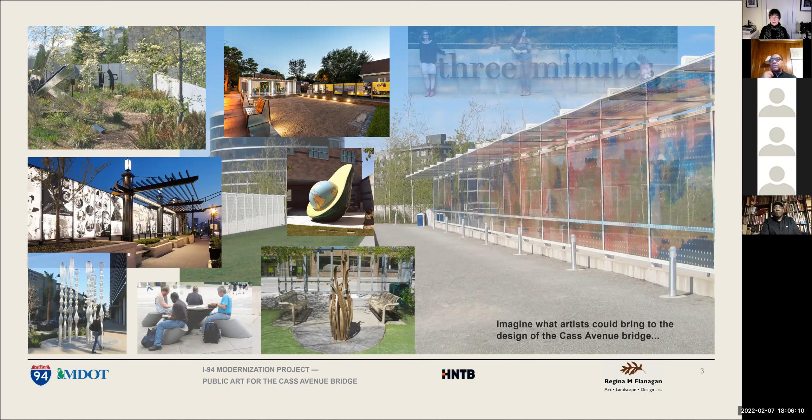The Cass Avenue Bridge—this is the piece of the Zoom meeting that is going to be an orientation to the project. The Cass Avenue Bridge is part of the Michigan Department of Transportation's I-94 Modernization Project and includes 67 bridges. Here you see the Cass Avenue Bridge.

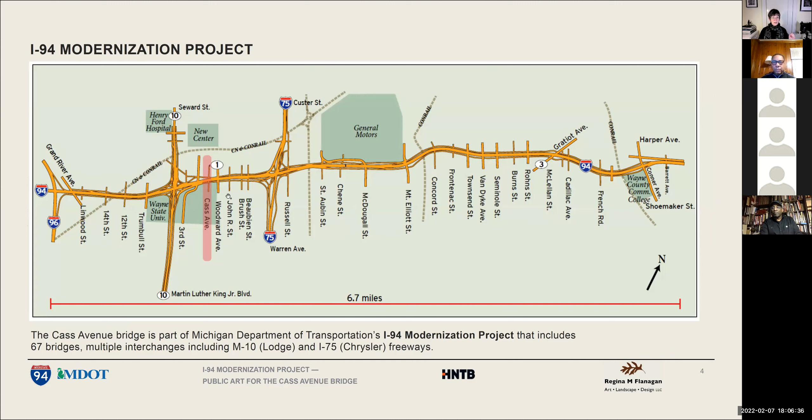The Cass Avenue Bridge is in Midtown, the location where basically Detroit's cultural district and education district is located. It includes the Cass Corridor, a famous corridor where many artists had studios, and Woodward Avenue, home to cultural and educational institutions such as the Detroit Institute of Arts, the College for Creative Studies, the C.H. Wright Museum of African American History, the Museum of Contemporary Art Detroit, and Wayne State University.

This project, like the I-94 Rehabilitation Project, has had deep, rich community participation, and will continue that tradition. From the start, MDOT sought out voices across the community to help inform the project design. The guidelines for the project talked about public art as being a key component, with unique potential to meet the goal of having the corridor reflect the community's hopes for the freeway redesign, the community identity, and Detroit's rich cultural heritage by contributing to placemaking, elevating aesthetic quality, and revealing history and culture.

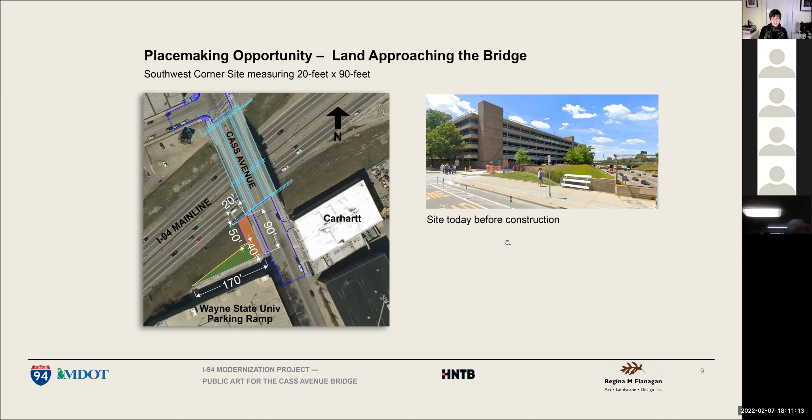Well, as you can probably figure out, the site itself will need some boundaries because there's a slope from the site down to the main line.

So there's walls and railings that will enclose the site, and they become potential for an artist's work too, as far as considering the entire site for placemaking.

So the walls and railings are potential, and the wall will basically be where you see the orange band on the left image, because as you can see, the site needs an edge for safety.

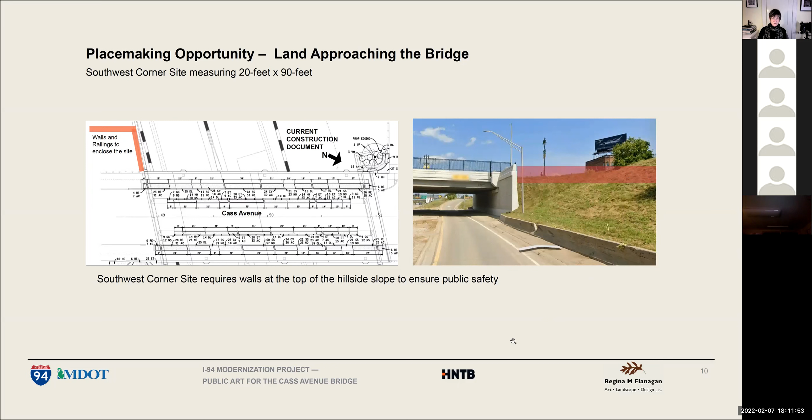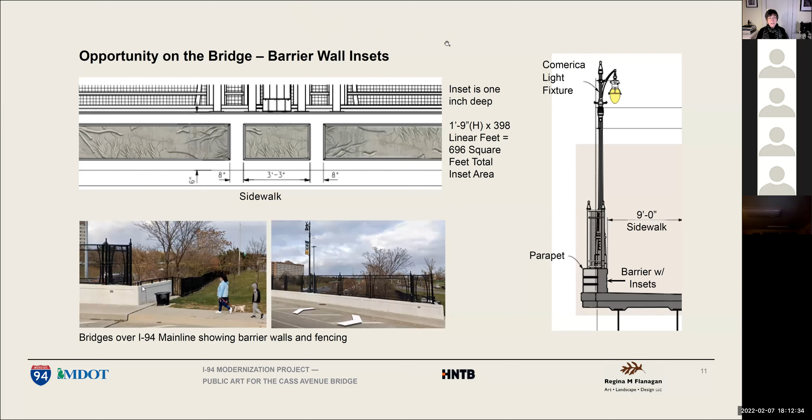We're continuing on through talking through the opportunities on the bridge. Now, the previous slide, if I can get back to it, it's not letting me do that right now. The previous slide showed an example of the site.

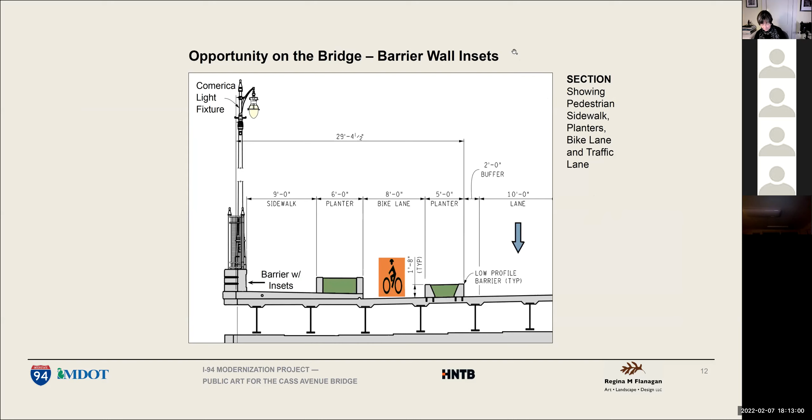I'm going to have to do an escape here because I'm losing control of being able to navigate the slides.

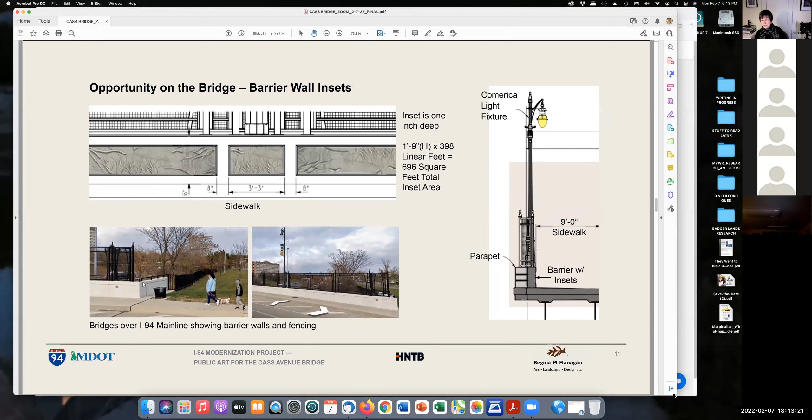I think you can all see them still pretty well. But I'm going to go from this on my screen and I'll make it as large as possible, even though it won't be full screen, but I think it's still pretty viewable.

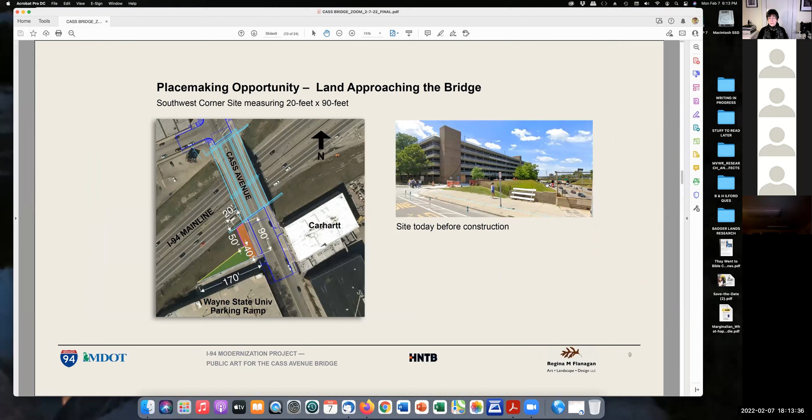The opportunity on the bridge includes these walls that you see here. And we're going to show you some examples. Here it is. This is the example I wanted to show.

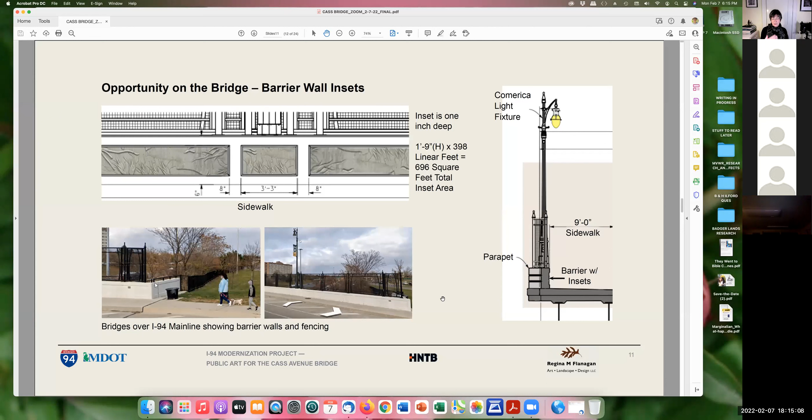Which is the Trumbull Bridge. So this one is just shown to, presented to show you the insets on the barrier wall. But this is the actual section of the Cass Avenue Bridge.

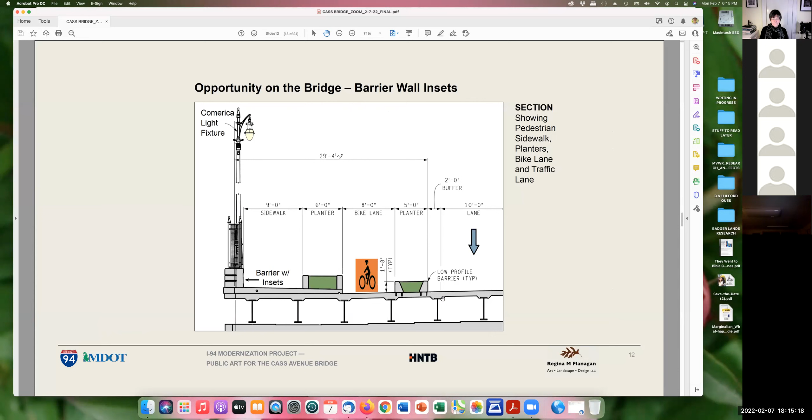The evaluation criteria, to go over that: the primary criteria is obviously the quality and ideas shown in your past work, evidence of completing projects of similar scope and complexity or progressively greater scale, and that the past work is constructed of material durable in the outdoors, because this is a real challenging outdoor environment.

We want to know about your ability to work collaboratively with government agencies, design and construction professions, and community groups in the creation of a project. That's particularly important. Also, examples of gaining inspiration through structuring and conducting community engagement.

When I come to the point of talking about the artist statement, which is part of this application, I would urge you to talk about your experiences in particular that meet these evaluation criteria. Also primary is familiarity with the city of Detroit, its people and culture.

Secondary is proximity to Detroit and the Cass Avenue Bridge site, the potential to involve students and youth in the process, especially during the summer design phase, and experience creating public art for a transportation project.

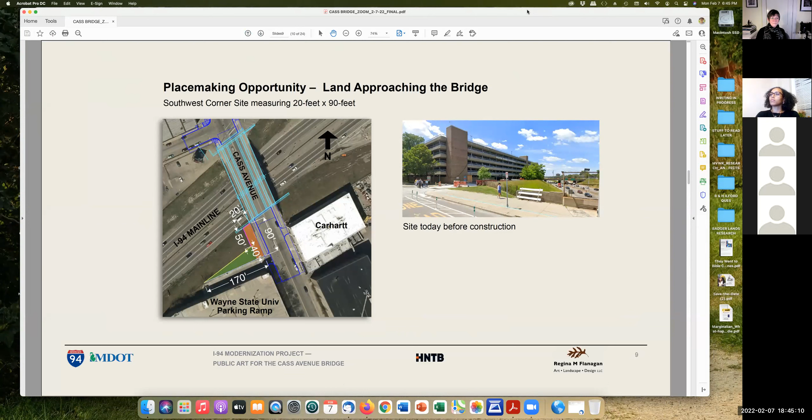I sense, since this is in the central business district of Detroit, you're going to get a pretty balanced 50-50 mix. People coming into the city in the morning and maybe going out towards the outer elements of the Detroit area in the evening. But it's also a campus, so I think my gut's telling me it's pretty evenly split. It's going to be about a 50-50.

That might help explain a few things. Woodward Avenue, for those not in Detroit, is where the Detroit Institute of Arts is located, the College for Creative Studies, etc. So there's a lot of movement throughout this district. Detroit also just built their light rail system on Woodward, the Q Line, which goes up and down Woodward. So there's becoming more of a pedestrian orientation and circulation pattern developed in this area, and this bridge is actually part of that.

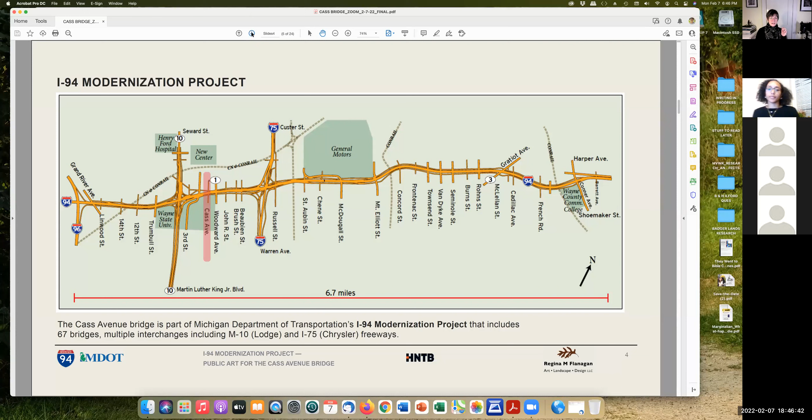If anybody who's from Detroit would like to add something, you're welcome to do so. I'm going to get back to some of the photos of the site, which might be helpful. While you're doing that, if there's no other comments, we can go to the next question.

What is the artist fee for the project? The artist fee for the project is included in the $200,000. That's the outer parameters of the project.

As artists get into working on the project, those of you who've done a lot of public art before have the capability to do a cost estimation pulling out your materials, fees, sub-consultants, subcontractors, etc. But for those trying this for the first time, I, as a public art administrator, can help by providing a budget document that helps itemize all the significant cost categories associated with your work. It's a form I've used with artists for a number of years, built off a Schedule C from the income tax forms, recognizing that you're a small business reporting in a certain way. So there's a budget document I can make available for those who need help figuring out what your fee will be. It's always a balancing act between how much you design, what materials you use, and your artist fees and what you need to see from the project. But I have to tell you that the $200,000 is inclusive, and it includes artist fees.

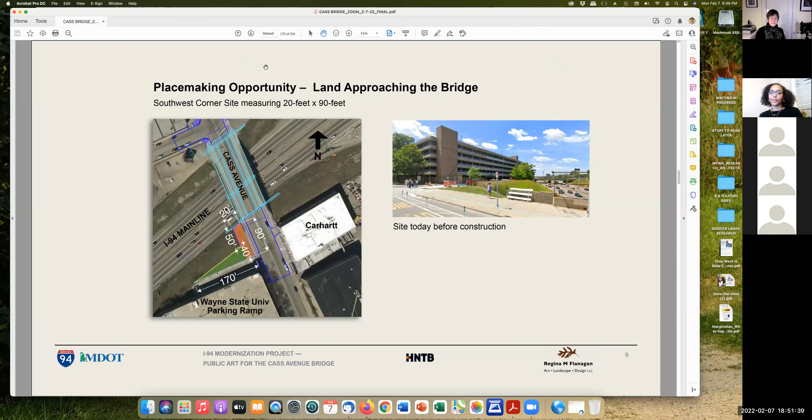Boy, that's an interesting question. I think that's the kind of thing that requires - I'm going to get to the barriers and the form liner issue here visually. I think that will be a discussion with Michigan Department of Transportation and the contractor. And I'm going to ask Eric to weigh in on this one too.

Doug, just a heads up, I'm going to ask for your opinion as well. But as soon as an artist is selected and we know what that barrier recession depth needs to be, you have an inch to play with. But if we need to modify it in any way to add more concrete so that the indentions from a form liner could be captured appropriately, that concrete addition would be captured by the construction budget. So I think in general, the answer is form liner costs would be the artist's responsibility. Any concrete related to form liner installation would be part of the construction budget.

Yeah, Eric, I might have a different opinion on that, but again, I think this is something we might have to talk to MDOT about. I'm not completely clear on the rules here, so I guess I would think that the material costs would be MDOT's, but I'm not sure. Material cost and forming costs would be construction costs, but I'm not sure. Thanks, Doug. That's definitely one I jotted down to get MDOT's opinion on, and we can go back to the team on that.

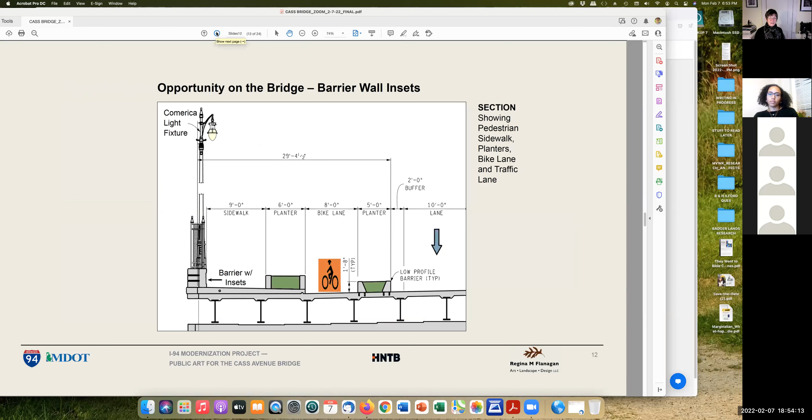Where is it? This is the wall right here. So we can't put anything on this sloped area that goes down to the main line - that would not be allowed for safety purposes. So I presume the artist is speaking of this green space we're looking at right here, which is up top and more flat, at the crest of that slope down. So let's answer the question with the understanding that we're looking at the 170 by 40 roughly space right here.

So would MDOT - I'm going to just replay this question. Would MDOT and the community be open to a contemporary design sculpture that took up space within and on the flat 90 by 20-foot area and also potentially spilled down into the green slope space? So this doesn't really spill down. So we're going to say, I think this is the gist of the question - and if it isn't, you can let me know - but can the artist work with this green area as well as the flat area?

And I believe the answer is yes, and it looks like the person that asked it says that I'm construing it appropriately. So Eric, we had talked about this. Yeah, everybody's correct there. Okay, so that space is open to influence by the artist, but it's not sloped, just to make that clear. And I might add...

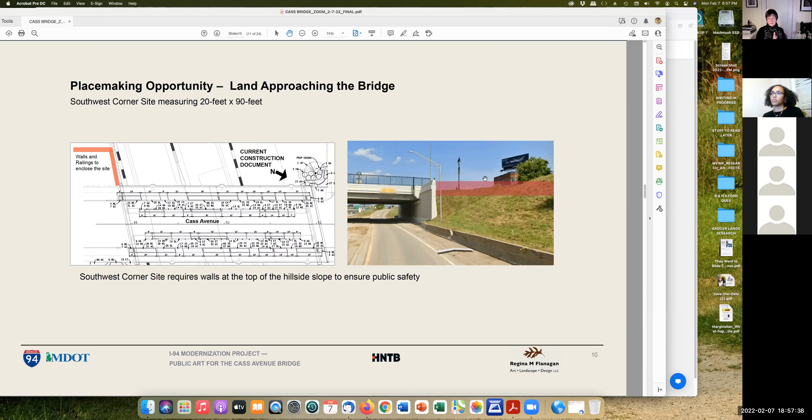Probably not too much, except if there are vertical elements, I would think. Because if you can imagine this orange band being the wall, and then the enclosure being back over here, unless the element is vertical, you wouldn't see it from the main line.

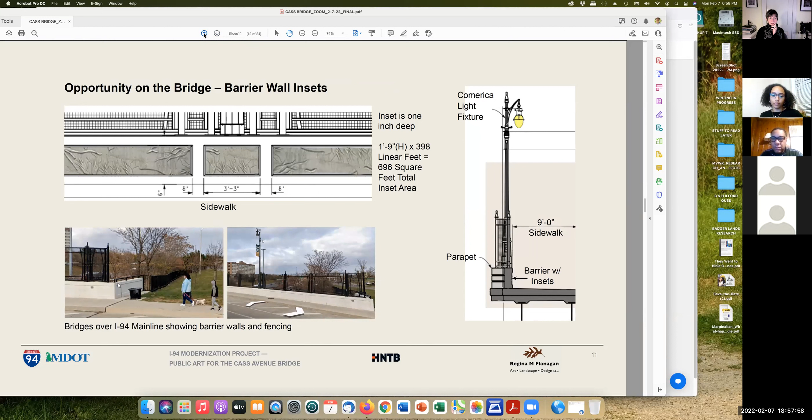Likewise, for anything sited on the flat area right here. Now, when we say in the guidelines or the open call that whatever is done with the site must meet both Federal Highway Administration and state design guidelines, there will be some things to talk about regarding vertical elements.

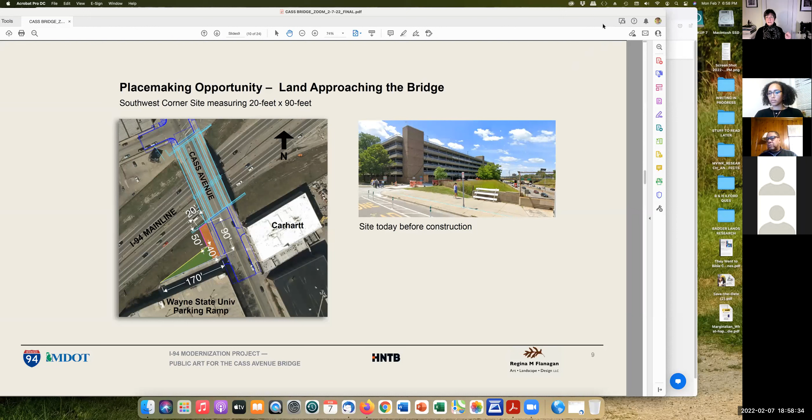I'll leave it at that right now because of sight lines, distractions, and general safety concerns. But all of that is something to be discussed as we get farther down the line. It becomes a kind of design challenge, something that you as an artist will be thinking about during design.

Regina, I would just like to add, in your picture here shown on the screen, everyone see that 20-foot dimension? There will be a full height retaining wall added to the west, or to the left, of that 20 feet in the future. So Regina was right on — really the only thing that would be visible from the freeway would be a vertical element. Everything else at ground level will be hidden from the freeway view in the future.

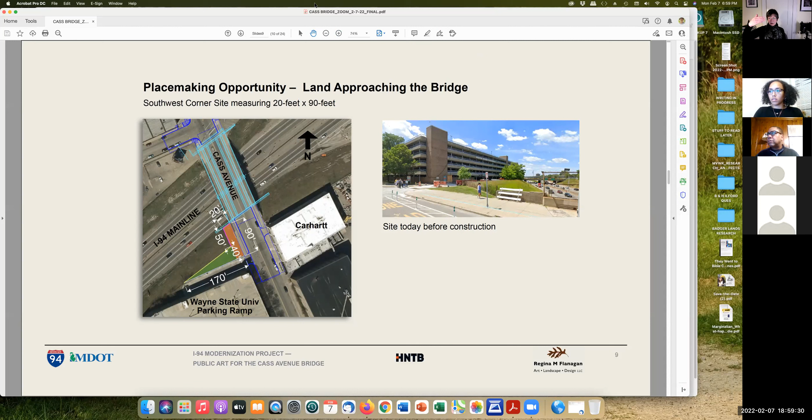How tall is the full height retaining wall? Oh boy, it's 20 plus feet probably. Now that's from the main line all the way up. Correct? Correct. Visible if you're traveling on the main line I-94, looking to your right as you approach Cass Avenue driving eastbound — it would be approximately a 15 to 20 foot high retaining wall.

Basically the height that you see there will just be continued, wrapping around. So there will be sound walls.

Another comment in the chat — well, these would be retaining walls because they're retaining the earth. There technically are sound walls on the project, and the requirement for sound walls goes through a noise analysis and meets federal requirements for noise levels in the area. So there are actual sound walls designed in particular areas of the corridor, driven by an analysis we've done. I don't know if we have a visual to share right now, but that's the long answer for no — these aren't sound walls, these are retaining walls, but they look the same essentially.